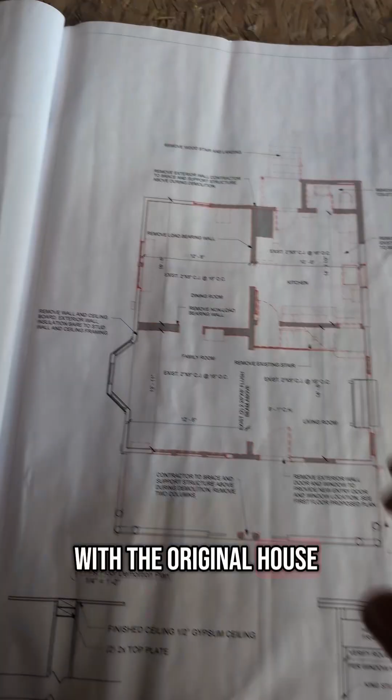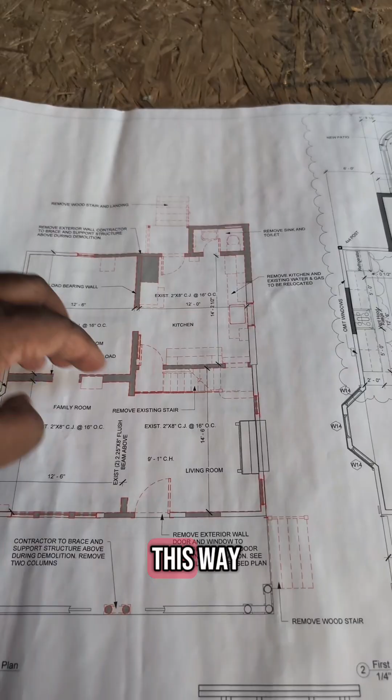Let's start with the original house. This used to be the first floor. There was this wall here that provided structure, and this here that provided some structure. I gotta remember now. Honestly, I don't remember which way the joists originally went, but I think they went this way and they sat on this wall. And there was a big beam in the ceiling here, and so it all sat here. But we opened it all up.

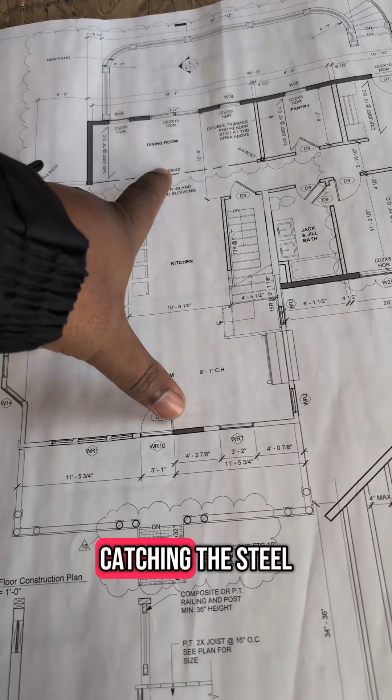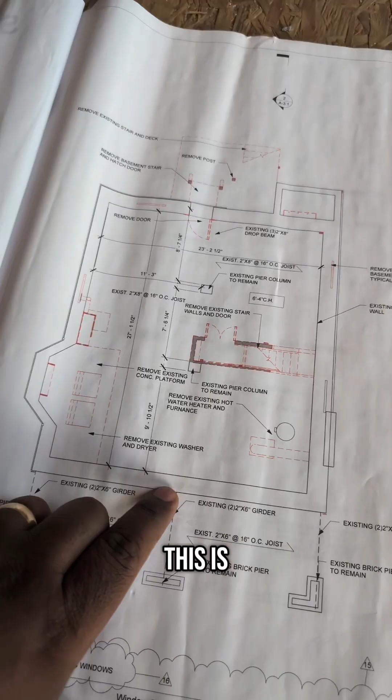So the first thing we had looked at was essentially putting a big beam from here to here that would have gone essentially right there, catching this steel sitting on the door. And that load, because you always have to think about how those loads get to the ground, used to come down to a pier here, this thick rubble foundation, and a thick rubble foundation. You know what, hold on. That was more than a foot thick of stone, plus the pier, and again, more than a foot thick of stone. And there was a beam that ran on top of that.

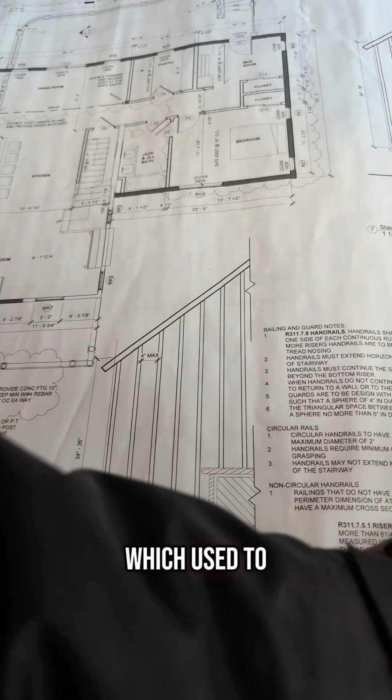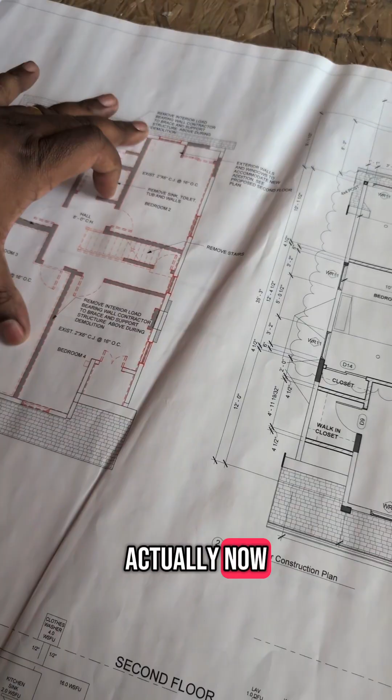And that beam used to carry the load of this wall, which used to carry, let's go upstairs, mainly this, and you can see it's disconnected here, but you can do the math and sort of figure out, okay, if I've got a load coming here and here, how much is actually landing here, what size do I need, that's all doable. But the idea was that this load came down on the wall, which came down on the beam, which went onto the piers and the exterior rubble down to the ground and sat on a footing.

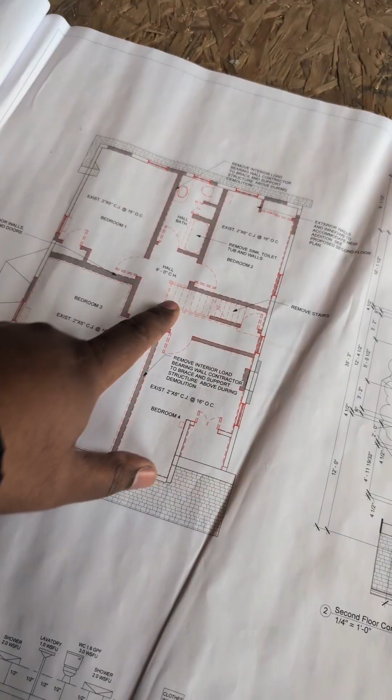And like I said, we got rid of all the walls in here and then rearranged them all here and changed the stair direction. The stairs used to come up and essentially catch that structural wall there and land there. Now we're going up this way. So we have to carry this opening, the whole open downstairs, frame it from side to side, and make it work. This is all an addition. This was easy to figure out.

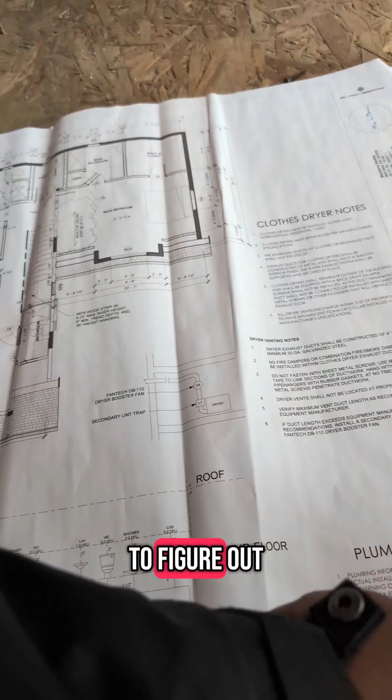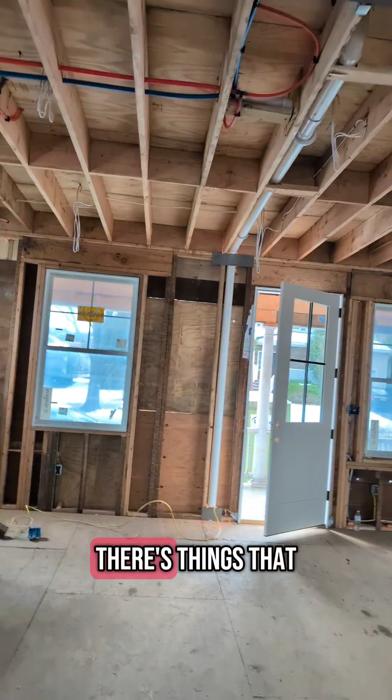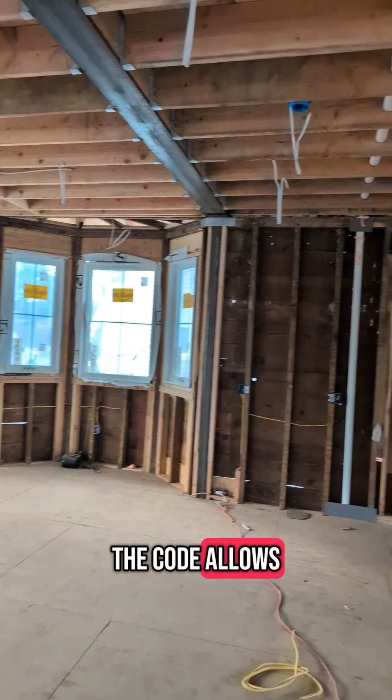And honestly, we had done the math, and the first version of what we came up with, now this is where it gets interesting. This is something that becomes problematic for some architects. And structural engineers really seem to understand this well. Not all architects do, but some do. There's things that meet code, and then there are things that are comfortable. For this span, it's almost 28 feet from side to side. The code allows, and I'm gonna get my math wrong, I'm just gonna make up numbers at this point, about an inch of deflection.

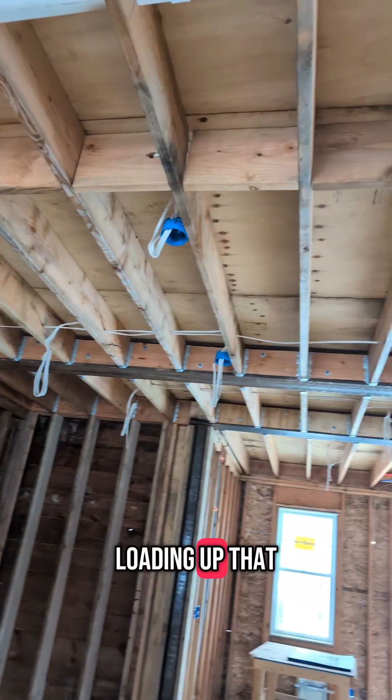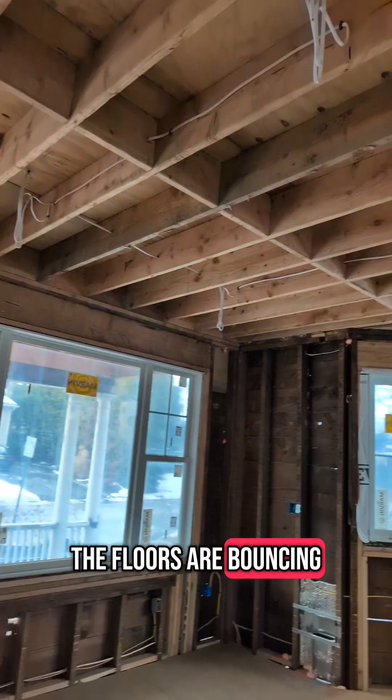What is deflection? That means that when you start loading up that floor up there, it is allowed to dip an inch, and there are no structural issues. There's no concerns because the span is long, but that is uncomfortable. When you're walking up there, it feels like the floors are bouncing. So we had re-looked at it and tried to figure out, how do we do this and not lose ceiling height? Because down here we've got a pretty decent ceiling height.

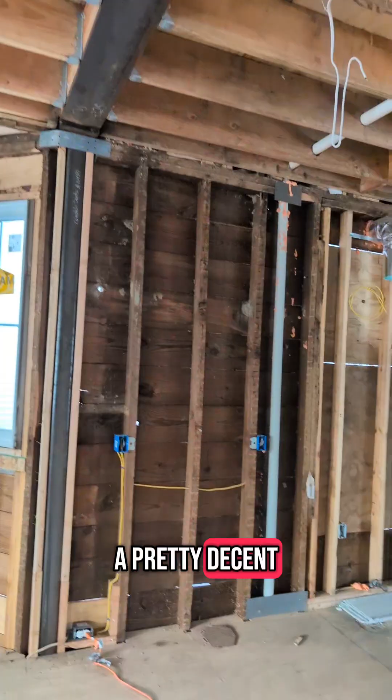I'm gonna turn around. I can't reach, there's significantly more room above me. It's over 9 feet. And then upstairs, because this is eventually gonna be a $1 million house, the ceiling heights were 8 feet. So we bumped the height upstairs, but we couldn't go too tall because we had a height limit from zoning. So we had to find a way to both raise this, but not make these too deep.

Because it could have been easy to just make these 16-inch deep beams, not have the deflection, use some engineered lumber and make it work. But we didn't want to change this height by more than 2 inches, so that when we raised upstairs 6 inches, we weren't losing a lot.

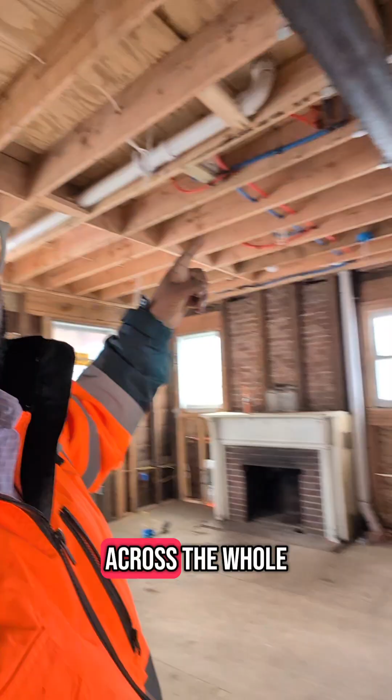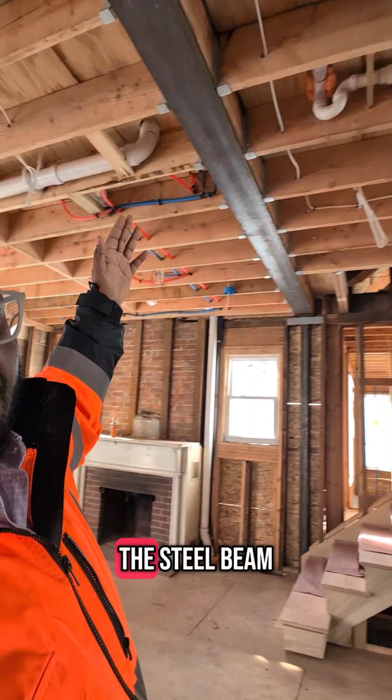So what we did is essentially take steel, sort of strategically placed. This is the one that's the most useful. It runs at the front of the stairs, across the whole house. It has a steel beam that comes down, and it carries the stair, the floor, and then the beams run off of the steel beam to the front of the house. Then from the steel beam to the next steel beam.

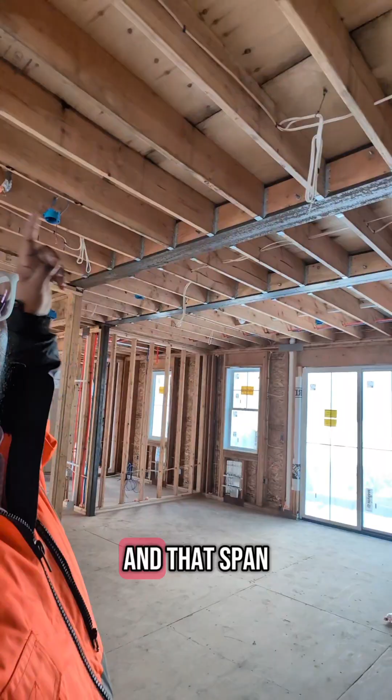And this seems excessive here, but this one was already in, and that span was too much to make the 2x10s work to get to here, because the deflection was too high. But it worked reasonably well to go from here to here. And then we just had this small span right here. And we already had this because that's the old end of the house.

Just got distracted by a phone call.

Anyway, so now we've broken this span up. The allowable deflection ends up less because the span's not so long. I'll give you a brief primer on how that works. Essentially, there's a formula. Your length divided by a number gives you your allowable deflection. 360 is the code minimum for total deflection. There's a combination. There's a live load deflection and a dead load deflection.

Dead load is sort of the stuff that stays, the floor, the wood floor, the sheathing, the things that don't really move. And then the live load is me dancing, jumping around here, because I am live and can move from place to place. And like I said, over 28 feet, you divide that 28 feet in inches by the 360, and you're almost an inch. And if your floor is moving an inch, you feel it.

Whereas now we've broken that span up, I think the largest one is this one, is like 12 feet. Now we're less than half an inch. We're 0.4 inches. That's allowed for this to dip and move. And then we even went higher from there. I think we used 480 or 600 so that these floors don't move. They're gonna move, everything moves, but you don't have it to the point where it's noticeable. You don't have a full inch that the floor is dipping while you have a live load on it.